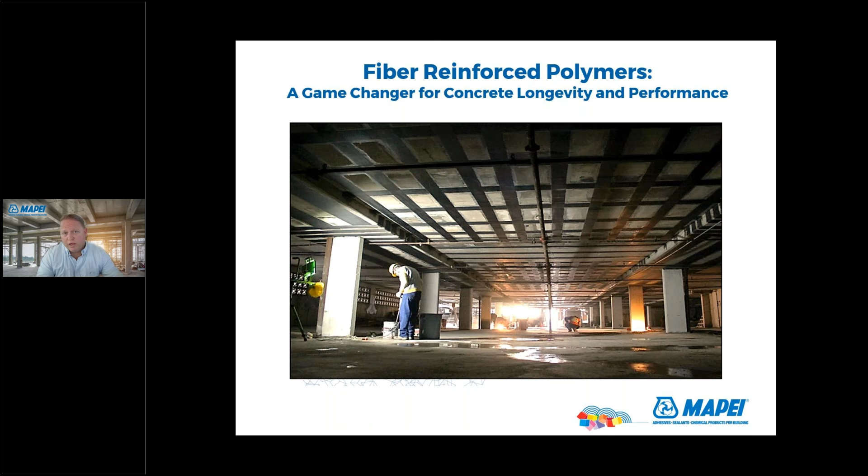Thank you, Brianna. Thank you guys for attending and listening to this today. I am a licensed professional engineer. I'm on the ACI 440 and the 239 committees. That's for FRP and ultra high performance concrete. I'm also a voting member of the ICRI 330 Strengthening and Stabilization Committee. I live in beautiful Tucson, Arizona with my wife and 4 kids. So I hope today you'll be able to take some valuable information for upcoming projects that you might have.

A little bit about MAPEI. MAPEI is one of the largest construction chemical manufacturers in the world. We're headquartered globally in Milan, Italy. Our U.S. headquarters is in Deerfield Beach, Florida. We have 24 product lines that over 6,000 products fall into.

MAPEI, being an Italian company, has the Italian culture of producing quality products. If you think of an Italian car or Italian clothes or handbags, you're always thinking these are top of the line quality. It's a cultural thing. It's the same with MAPEI. We make very high quality products. I work for several manufacturers and contractors, and I don't hear people saying bad things about the quality of MAPEI's products.

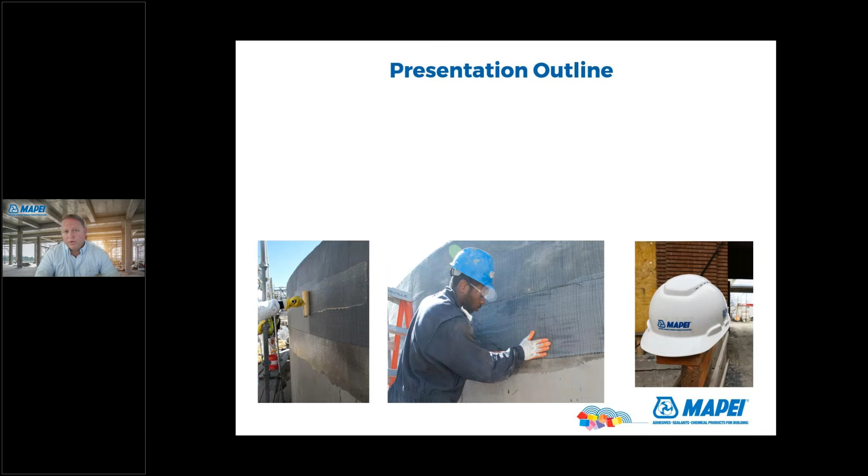So here's an outline of what we're going to talk about today. What are fiber reinforced polymers, or FRP? Their properties, some typical applications, some installation and quality control recommendations, design guides, what's the role of the engineer, and how MAPEI assists and comes alongside the engineer in this process.

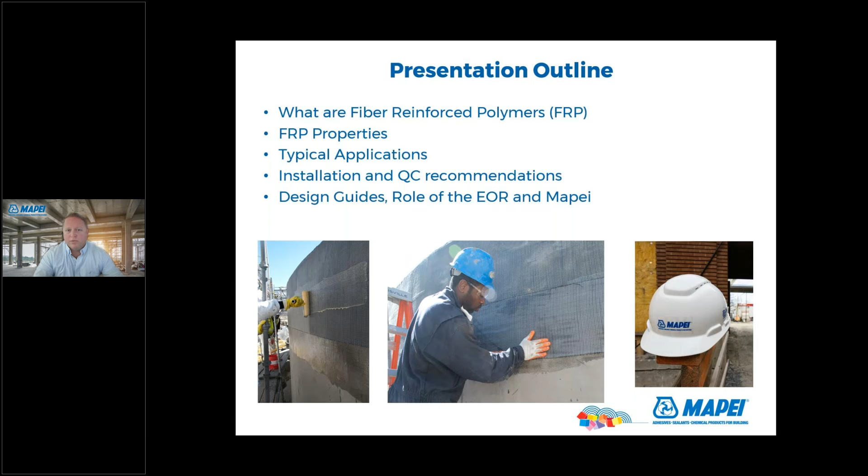There's a lot of industries that have been using FRP composites. You think of the sports world with the carbon fiber bicycles and golf clubs, snowboards, hockey sticks. Same with the automotive, like I just mentioned, the Formula One race cars. They're made with carbon shells, very lightweight, very strong.

The industry that's done by far the most testing of these materials is the aerospace industry. And I tell people, if you're comfortable flying in a carbon tube at 30,000 feet going 700 miles an hour, you should feel comfortable having these same type of materials used on your local bridges and the buildings you work in. They've also been used for decades in the marine industry.

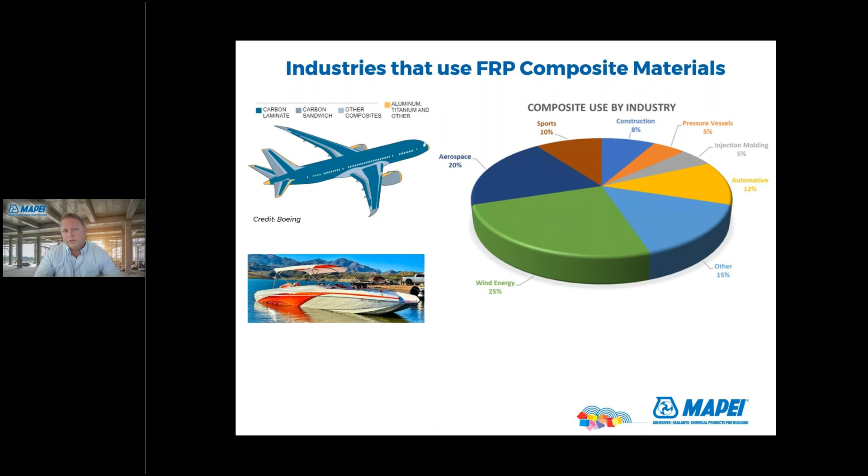You think of these hulls of boats. They use a fiberglass and a low quality resin, typically a polyester resin. These boats sit in salt water day in, day out for years, and they perform very well. It's also used in more harsh chemical environments like septic tanks, where you have hydrogen sulfide gas, and they use the same type of fibers but just change the resin system. In those resin systems, typically they'll use a vinyl ester instead of a polyester or an epoxy type resin.

Now, for the construction industry, there are a couple limitations. One, these materials are expensive relative to traditional materials. You think of what concrete and steel are going to cost way less than these composite materials. And they also have a poor fire endurance, especially the epoxy.

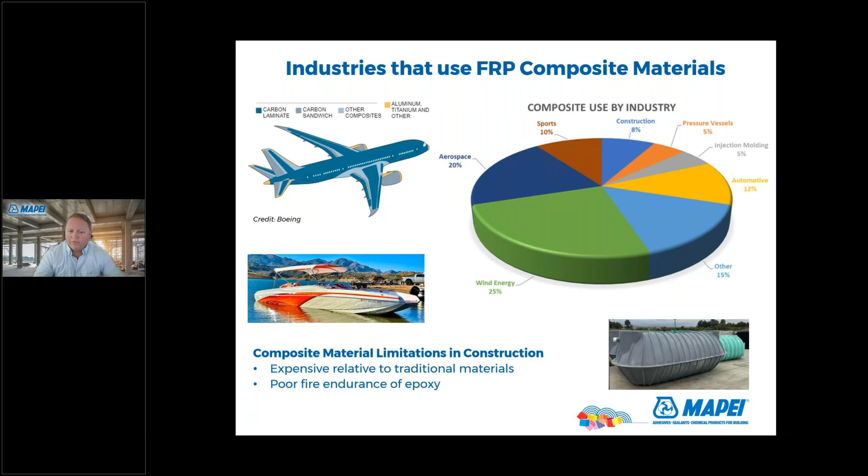So reasons to strengthen your structures. One, maybe you have a change in use. You're transforming a hotel into a hospital, and you're going to have a higher use.

Or you think about all these old bridges that were built, and we did not foresee the sizes of the vehicles going over them, or parking garages, and now we have these electric vehicles that weigh considerably more than what they initially were designed for.

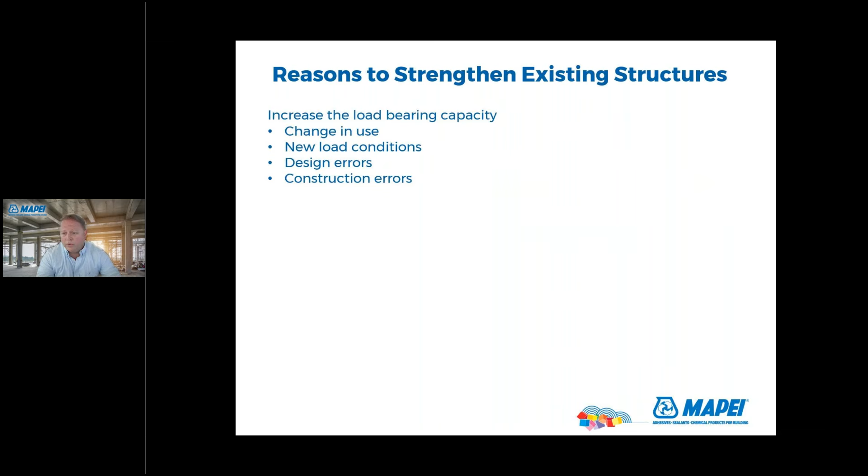Sometimes there's design errors. Sometimes there's changes to the code. One great example of this I like to give is the ACI code for concrete columns before 1970. Then they didn't have much detail on the ties that went around the columns. They just said, put it every 12 inches, regardless of the size of the column, regardless of the size of the longitudinal bars.

What happened is the Loma Prieta earthquake, where there was significant loading and the concrete shell on the columns broke off and those ties opened up. And so the design community came back and said, there's got to be a better way to do this.

So now the hooks are determined. There's now a 135-degree hook that goes into the column, and that way, under significant loading, it pinches the hook and keeps it from wanting to open up. And then they've also changed the requirements for the size of those hoop ties, depending on the column size and your longitudinal rebar size.

There's also construction errors. This happens quite a bit, and one great example is there's two nine-span bridges being built. The contractor finished the first, and when he was building the second nine-span bridge, the inspector came by and told the contractor, hey, it looks like you're leaving out half the steel on the deck.

And the contractor goes, no, I'm doing this the same way I finished the last one. Well, the first inspector and the contractor missed it, and so now you have a brand new nine-span bridge that is built. What do you do? Well, the engineer knew about FRP and that it can be used to strengthen his new bridge.

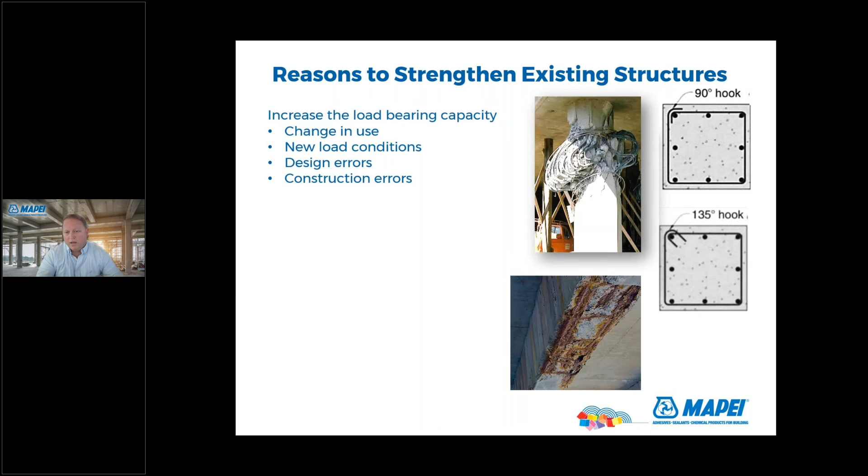Another common thing that can happen is a loss of capacity. This typically comes from corrosion of the reinforcing steel. That's the most common cause.

Sometimes the steel gets cut or damaged. You think of contractors like a plumbing contractor that doesn't scan the slab and he's cutting through and he severs some bars. You have impact damage, maybe a vehicle hitting the bottom of a girder and exposing some of the steel or the strands. There's fire, natural disasters.

They're also used to increase seismic performance. This is one of the main interests early on, because these materials are very lightweight. You're not adding a lot of dead load to the structure, and you're able to increase the strength of the structure.

And then same with blast resistance. A lot of the federal buildings utilized doing an FRP retrofit because they're concerned about a terrorist attack and having a progressive collapse where a terrorist takes out a column or two and the whole building collapses. So they use FRP to strengthen that to prevent those progressive collapses.

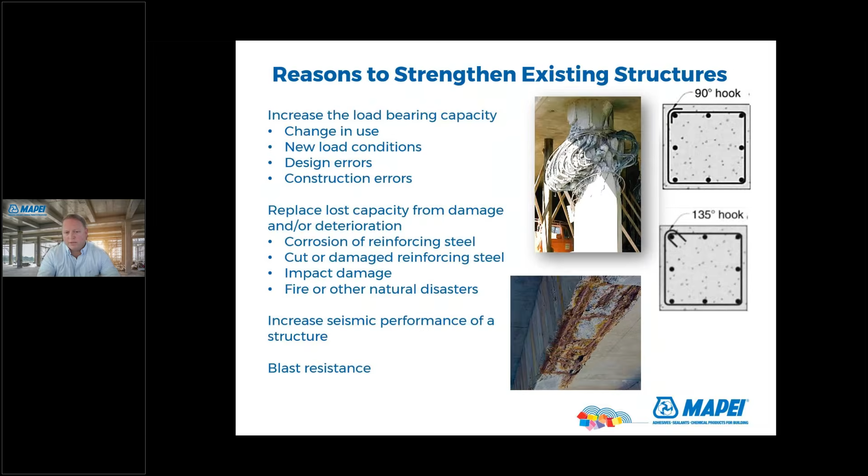So fiber reinforced polymer, it's a high strength fiber, carbon or glass. And just to compare these, a typical rebar in construction, you have about, say, 60 KSI. The dry fiber strength of these carbon fabrics is around 700 KSI, so about 10 times stronger.

Now, unfortunately, there's no way to utilize the dry fiber in our projects. We actually have to get it wet with epoxy to adhere it to the structure. And when you do that, it ends up lowering the strength, but it's still around 210 KSI. I just took an example of MAPEI's kind of middle of the road carbon fabric. So significantly higher tensile strength than the steel.

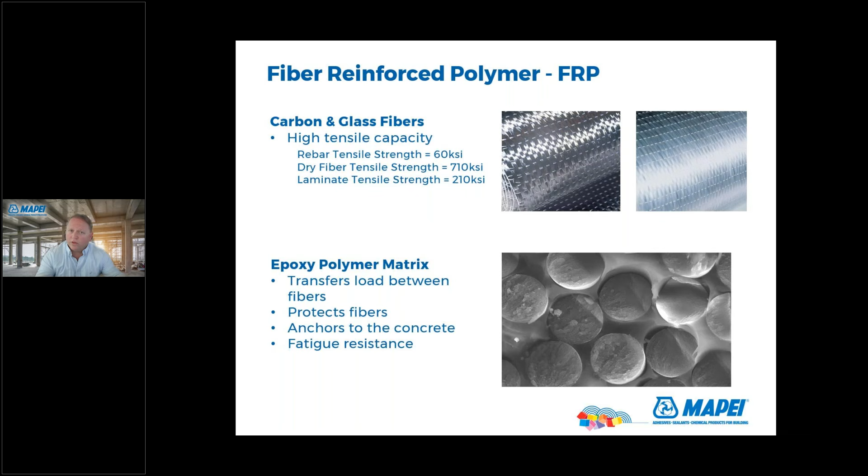And these fibers are getting saturated in an epoxy matrix. So these fibers are very thin, about 1/25 the size of a human hair. And this epoxy helps transfer the load between the fibers, it protects the fibers, and most importantly, it anchors it to the concrete itself.

So some advantages: FRP is very lightweight. It has a very high strength to stiffness ratio. It's non-corrosive. This is one of the miracle properties of it, especially as our existing structures are corroding. By adding additional reinforcement that will not corrode, that's a huge win.

It has a very low profile, very thin. Great application on the bottom of parking garages, on the bottom of joists, where you can't add a lot to the cross section because you have trucks driving in there and everything else.

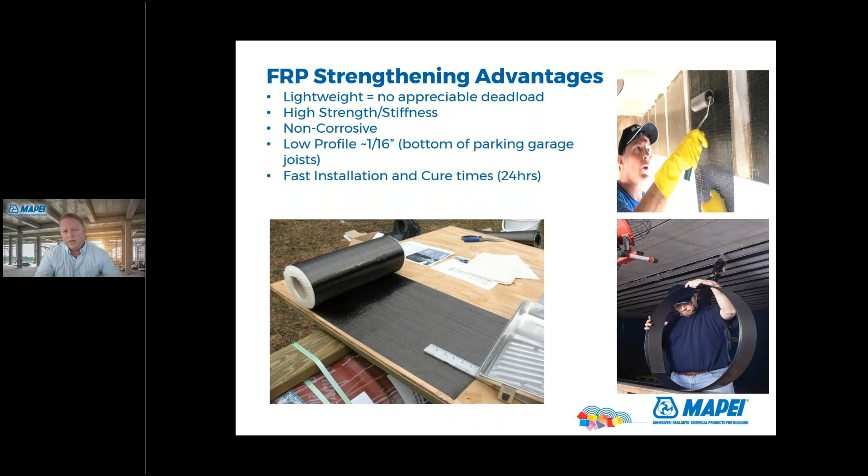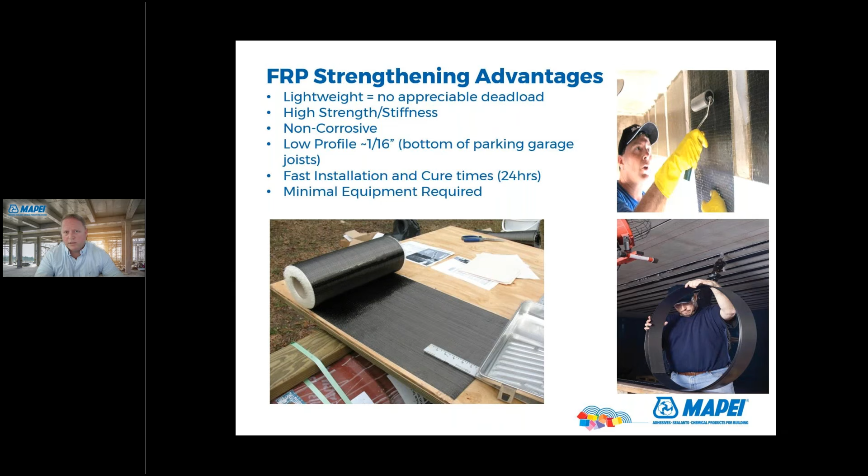There's a fast installation and cure time. Typically, by the time you put it up, 24 hours, the system's cured, your structure's strengthened. And then also very minimal equipment. You don't need heavy equipment. You see a roll of fabric. You see this gentleman just carrying some of this material, buckets of epoxy. So minimal equipment required to do these projects.

So some FRP material properties.

FRP is linear elastic until it has brittle failure. Steel has a very nice behavior where it gets up to its yield strength and then it basically yields. What that does, and why engineers like it, is it gives us a visual indication that something's wrong. As the steel begins to yield and stretch, we get to see the ceiling or the bridge starting to sag, and you go, something's wrong, let's get the people off of it and take a look.

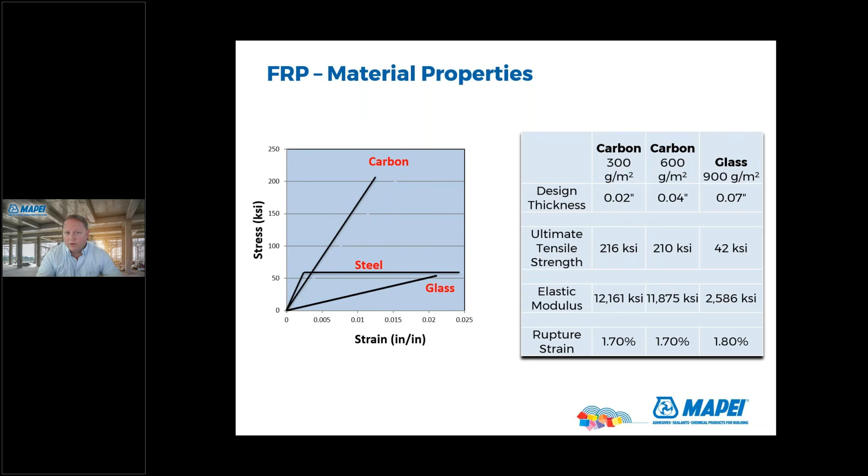FRP does not have that. FRP does have a brittle failure. So although the materials are much stronger than steel, it does have this negative limitation where it has brittle failure. Now, the ACI 440 guide takes these into consideration so you're not getting to these ultimate values.

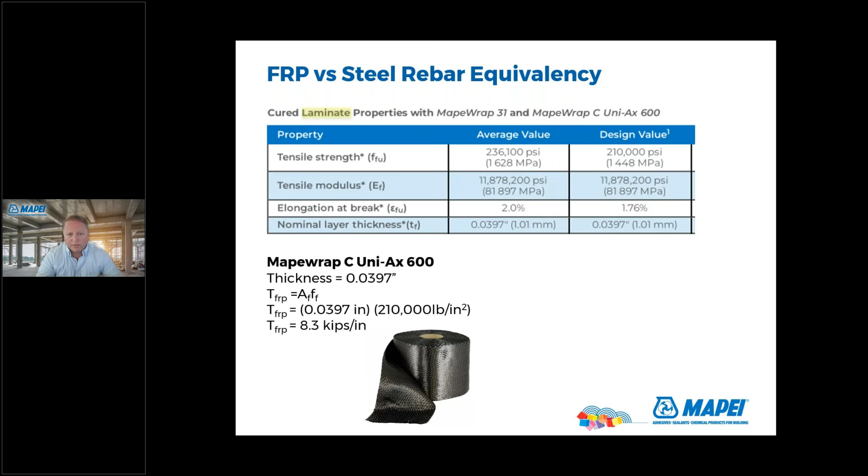A little comparison between FRP and steel rebar. I took this middle of the road carbon fabric from MAPEI, and looked at the thickness of one layer. The cured system is 0.0397 inches, so very thin. To calculate the tensile force, you take the area of that fiber times the tensile strength. The design strength is about 210 KSI, which gives you about 8.3 kips per inch. In layman's terms, that's 8,300 pounds for every inch of one layer of the fabric, basically like one layer of fabric could lift up an F350.

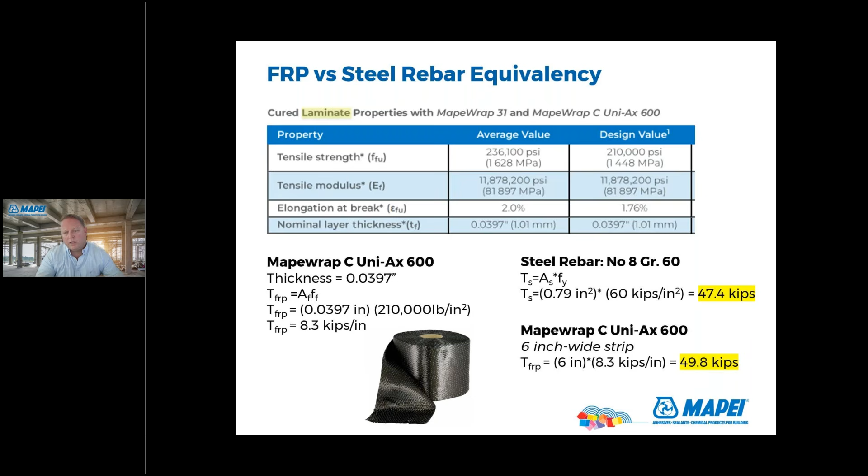If you wanted to compare that to rebar, you take the tensile area of the steel times the strength of the steel. A number 8 bar, grade 60 steel, 0.79 inches times 60 KSI is 47 kips. So how many inches of fabric do I need to equal this out? About a 6-inch wide strip gives you the same amount of kips as a number 8 bar. So the materials are incredibly strong.

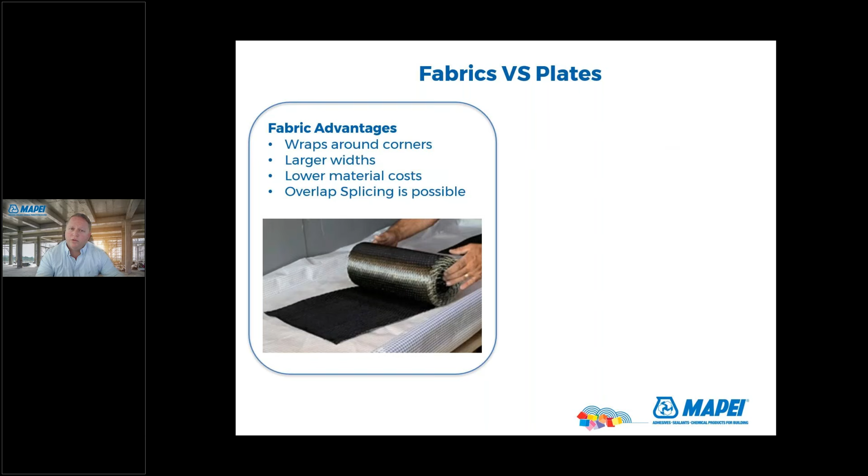There's fabrics and there's also plates, and they have advantages and limitations for both. With the fabric, it wraps around corners, it has larger widths, the material cost is lower, and you can do overlap splicing as well. The plates, you're not able to do that, but the plates are factory laminated, so that increases the quality assurance, where you don't have a contractor in the field saturating the fibers and making sure he's mixing it correctly. This is done in the factory.

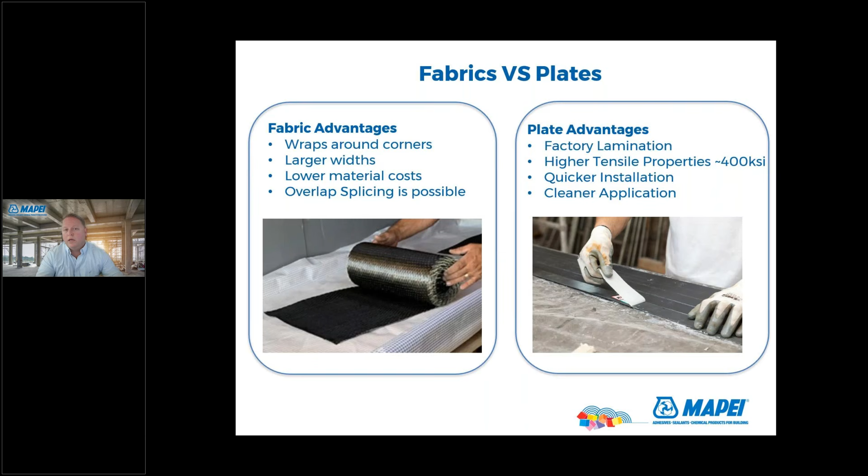The plates also have a higher tensile value. Instead of 200 KSI, you're looking at 400 KSI. It's quicker installation and generally a cleaner application. You're using less epoxy, less surface prep. So the plates have advantages, and the fabrics also have advantages.

To show you the different costs for upgrading a beam: if you have a 16-inch wide beam, maybe 40 feet long, and you want to do a 50% upgrade in the live load, you could go the conventional route and add a couple number 4 bars, form it up, add some grout in there. Between materials and labor to do that beam, it's probably going to be around $4,000.

Now if you use the fabric, one layer of our lightweight carbon fiber adds about 8 pounds of dead load, placed by hand. Materials and labor comes out around $1,800. If you did the plate, one strip of a 4-inch plate, same amount of dead load, placed by hand, comes out around $1,400. There's different ways to skin the cat, and each project is different, but in general terms, this is the cost difference for strengthening beams.

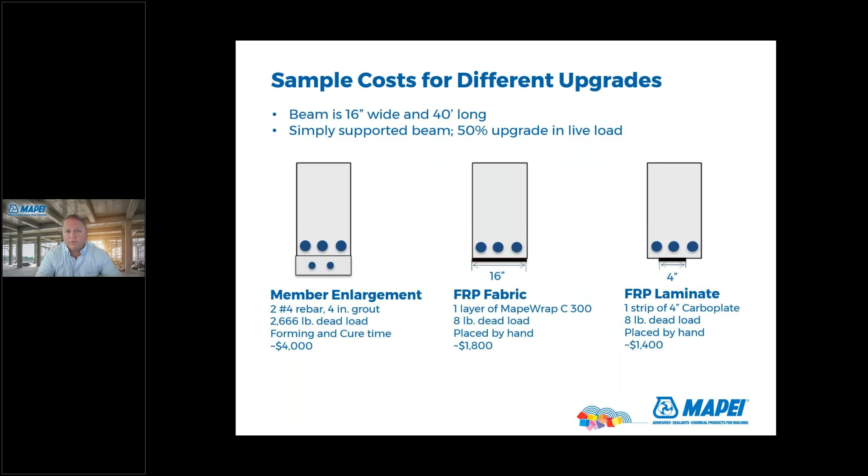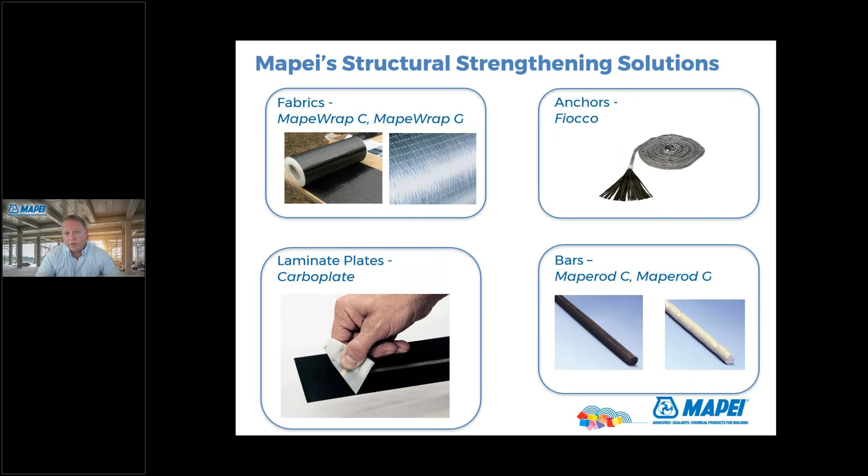MAPEI has a whole suite of FRP type products. We have the fabrics and the plates, we also have these carbon FRP anchors, and then same with these bars - we have carbon bars and glass bars as well.

Before you can even consider using FRP on your structure, there's a few things you need to look at. First, you need to make sure the compressive strength of the concrete is above 2,500 PSI. If it's below that, FRP is not going to be a candidate for your structure. The other thing is the engineer of record needs to look at the primary or existing reinforcing in the concrete member and make sure it is above this 1.1 service dead load plus the 0.75 service live load.

If the structure cannot stand with the existing reinforcing in there, we don't want to add a bunch of FRP, because what happens if there's a fire, or someone comes in and vandalizes the FRP, taking a grinder and cutting across these plates in this picture? We don't want the structure to collapse because of that. That's one of the equations that needs to be satisfied.

So if it can meet the primary reinforcing, but you have additional loading, maybe additional safety loads that are going to be added, FRP is a great candidate.

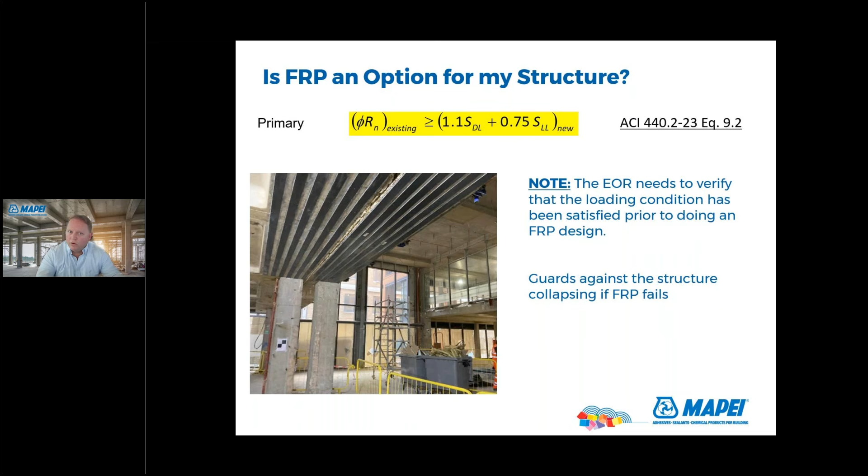In regards to FRP and fire, FRP has a poor resistance to heat and fire exposure. Typically around 140 to 180 degrees, the epoxy begins to transition from a cured state to a softer state. They call it the glass transition temperature. ACI says FRP composite should be considered completely lost in a fire event.

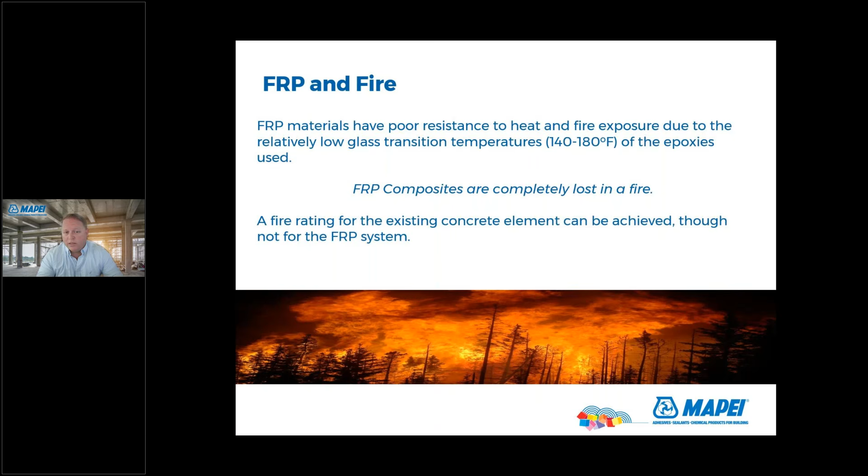Think of a 1,000-degree hydrocarbon fire. You can put different types of fireproofing coatings on there. They're expensive—some of these cementitious ones you can add a couple inches. What that's going to do is add additional cover to the concrete member so the steel interaction with the concrete isn't damaged from the fire, and so it can have fire ratings, but the FRP is not going to make it through the fire. Just something to be aware of.

So some typical applications for flexural strengthening: this is if you have a uniform load on the top and want to increase the bending capacity. On the bottom of this beam, the fibers on the concrete are going to be at the most extreme tension phase, and in a situation like that, you put the FRP there.

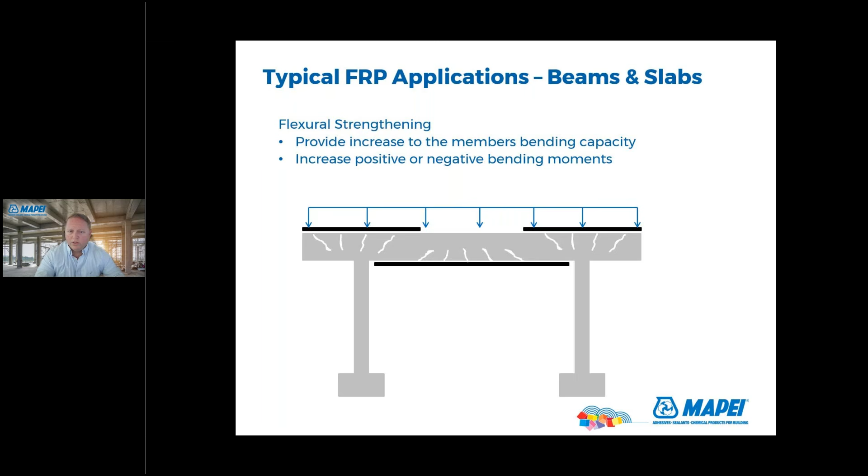But then think about the top areas above the column. If you add a load, it's going to want to sag the opposite way, so the FRP would go on the top. You can utilize FRP to address your positive and your negative bending moments.

Now, the way ACI approaches flexural strengthening is very similar for reinforced concrete as it is for FRP. In reinforced concrete, for calculating the moment, you're looking at the area of the steel times the strength of the steel times the distance from the neutral axis to the reinforcing steel. Similarly, the FRP's contribution is the area of the fibers times the effective stress of the FRP times the distance to the neutral axis.

Now looking at the neutral axis, you can see the FRP is going to be a little farther away than the steel rebars are. That's good—it gives you a little extra moment arm there to help give you a little bump.

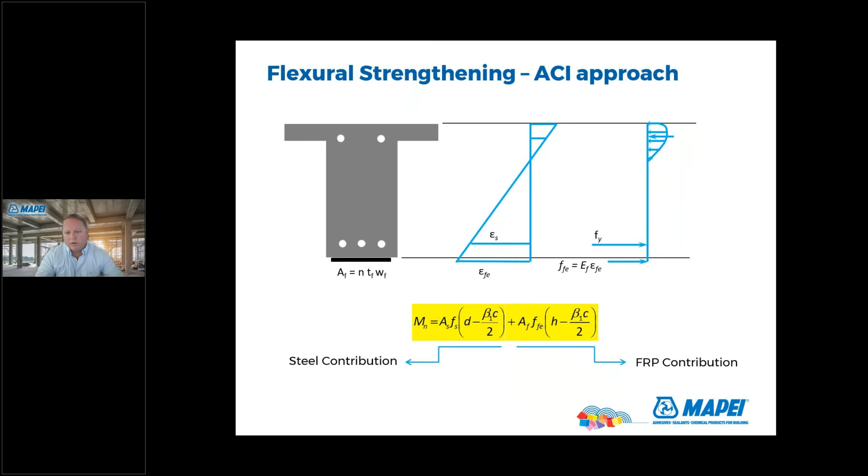Now, as it relates to effective strain, the strain level for an FRP system is typically governed by debonding of the cured system. So in practice, and what research from universities has shown, is that the FRP is going to debond before it reaches its ultimate strain.

And so the ACI committee derived strain equations to limit the amount of strain that can be utilized. We just don't want manufacturers like MAPEI getting callbacks saying we put up the FRP and now it's starting to come off. So these strain equations limit that strain.

Another thing is as the compressive strength of the concrete, F prime C, decreases, the likelihood of debonding increases. That's why we have a minimum of 2,500. If you have higher strength concrete, that's just going to help you.

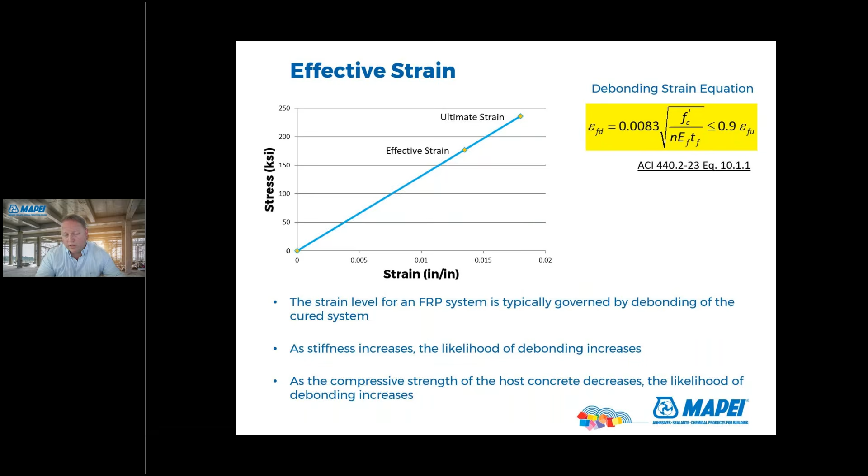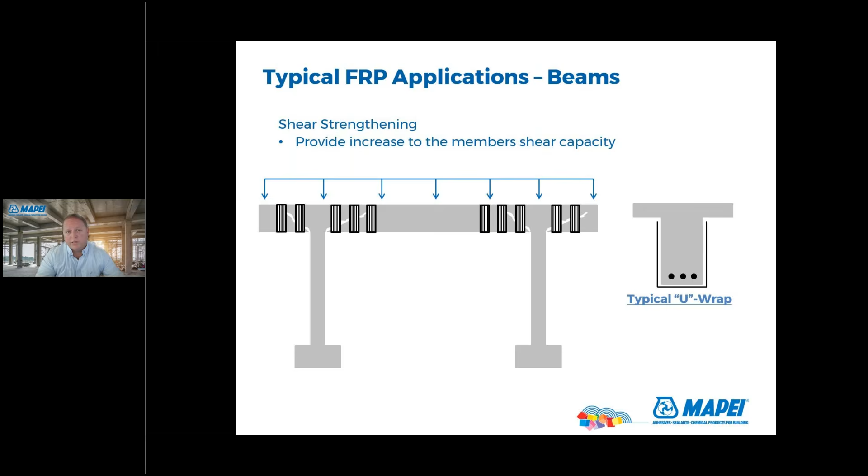Now, anchors are also used, especially in these applications for strengthening beams. We've seen that up at the top. That is an area where the development length is typically not long enough to develop the strength, and so it'll typically debond right up at the top there. So some of these FRP anchors are used where they'll drill into the slab above or the beam, epoxy that hole, and then stick these FRP anchors and fan it out to help increase that development length and keep it from debonding.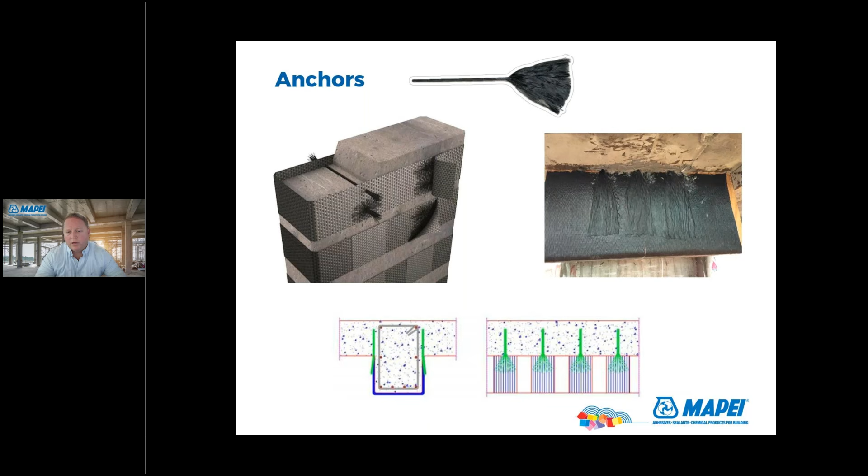So another common application, this is for walls. If you want to do some flexural strengthening on a wall, say this one on the left, you have a load, and on the right side of that wall, it's going to be in tension. So you put the FRP there, and you can do this in strips. We see this a lot with basements that are bowing from the outside soil. They'll go and put this FRP up against the walls. You're not adding anything, you're not losing any space in your garage by doing this.

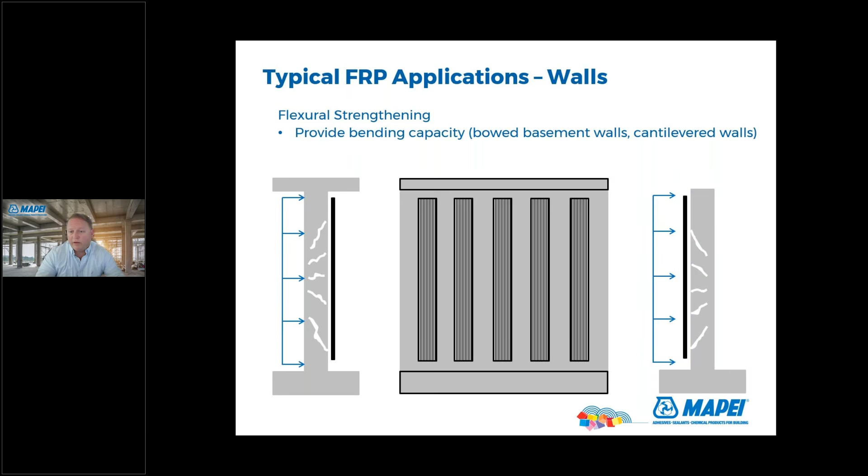And then here, this picture on the right, the wall is cantilevered. On this one, the FRP is going to go on the left because as that load pushes, the left side of that wall is going to be in tension and start to bend. And so you put it there.

Now, one of the best applications for FRP is when the material is going to be wrapped onto itself. These are confinement type situations. You think of columns or piles or even pipes. If you're looking at flexural or shear strengthening, you're really depending on the bond between the FRP and the concrete. Now, if the material is getting wrapped on itself, you're not as concerned about the bond. And so ACI says, okay, for flexural shear applications, those are bond critical applications. But for wrapping columns or piles, these are confinement.

And so with wrapping these, you can get an increase in the axial capacity. You think like the load's coming down, the column wants to dilate, and the FRP holds it in there. So you can take a 3,000 psi concrete and cause it to act like a 4,500 psi concrete.

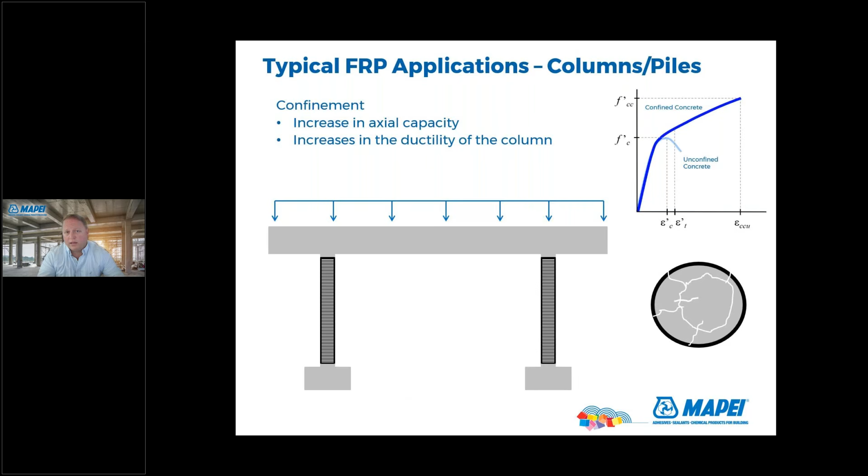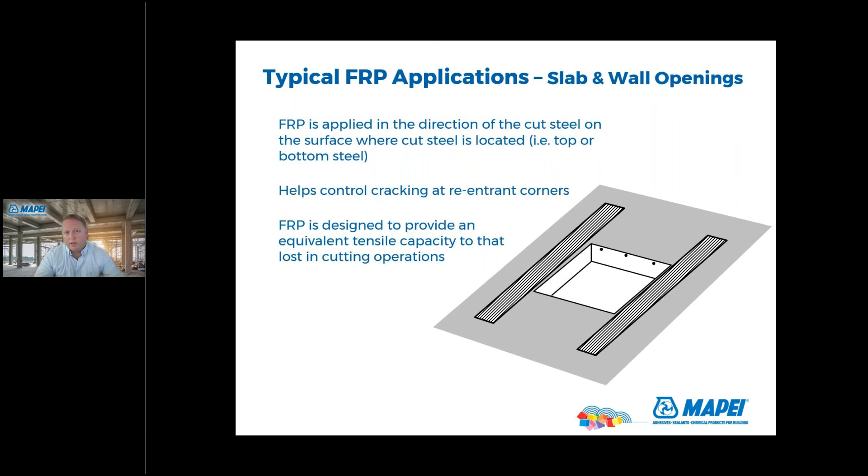Another common application, slab and wall openings. Maybe new ducts are being put in, or a new window or door, and you're going to be severing some of the steel. They can put FRP there to make up for the capacity that's going to be lost from severing those bars.

So this is some strengthening limits, typical ranges. Every project's different depending on the size of your member and the reinforcing that's in there. But for flexural, you're going to be looking at a range between 40 to 100% increase in the strength. Shear 20 to 150%, and then axial about 20 to 100% increase.

These pictures just kind of show you the existing reinforcing. You add some FRP. It's similar to if you had a tighter spacing on your bars or more bars in there.

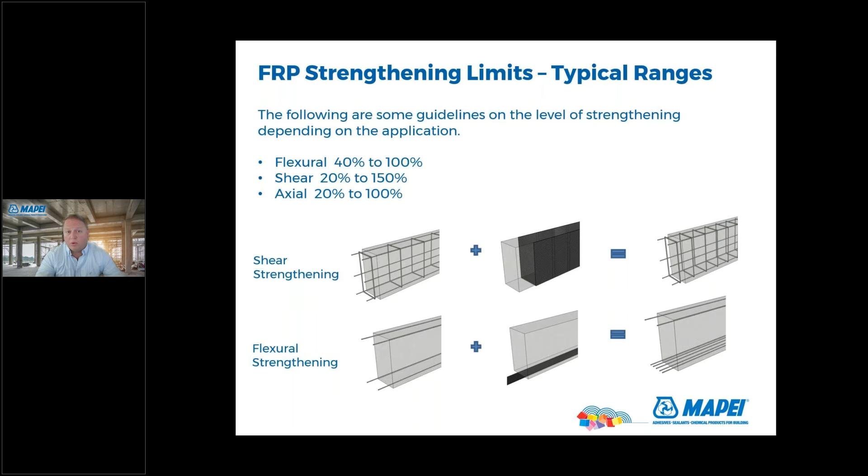So I have a few questions for you as the audience, having gone through some of these examples, just to see if you guys are retaining this and grabbing onto this. So this first one, we have a beam, uniform load. We have 4 scenarios. Where would you put the FRP? Would it be on the bottom, number 1? Would it be up at the top? Number 3, it has it showing on the side. And then number 4, has it showing on the side in the middle of the beam going up and down.

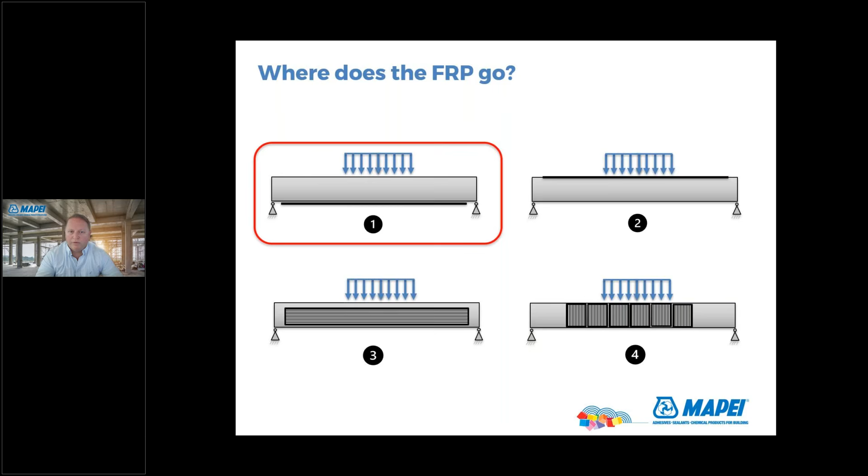If you thought number 1 makes sense, that's correct. Now, you could also do number 3, but you're not going to be able to utilize the full benefit of the FRP being farther away and getting a bigger moment arm. And so number 1 is a more efficient use of the FRP.

Here's a column, 3 scenarios. You got a load going down. You put FRP on number 1 here on the sides of it. Number 2, kind of wrapped around in confinement. Number 3 is going on the sides, and it looks like there's an anchor going into the footer there to help it. And so if you looked at this and you go, yeah, number 2, that would be correct.

Now, if we took this load instead of going straight down and we turned it and made it go to the side, then you would look at a situation like number 1 or number 3, because now you want to prevent the column from bending in that direction, so you want to look at those situations.

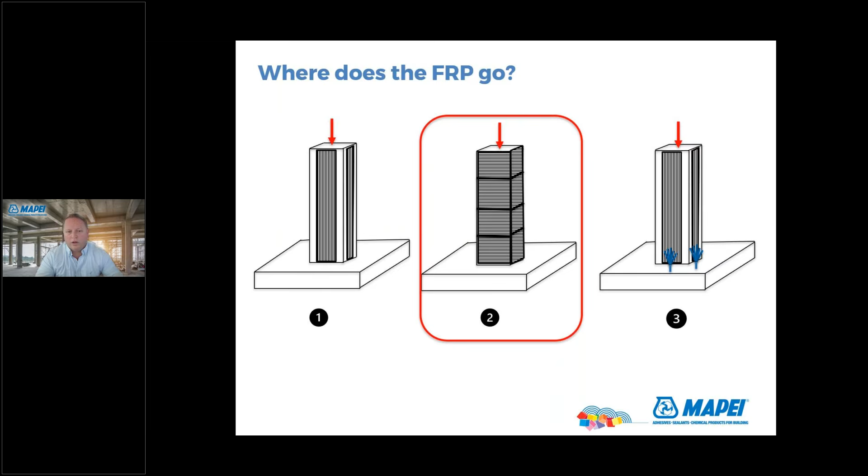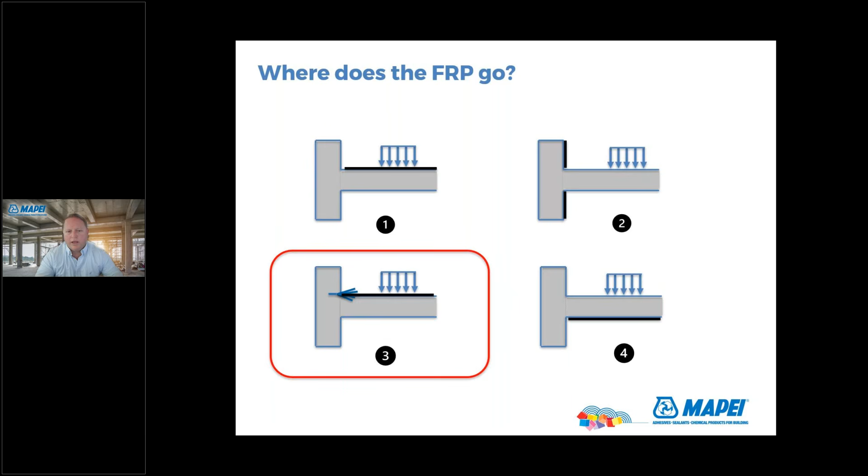All right, last one. You have a cantilevered beam here, uniform load on the top. Number 1, the top of the beam. Number 2, the sides of the column. Number 3, the top of the beam with the anchor going in. Or number 4, the bottom. If you thought number 3, that would be correct. The anchor's going in there to prevent it from having that 45-degree shear crack at that interface.

So another type of application is these near surface mounted rods. These are where a saw cut groove gets put into the concrete, it gets filled with epoxy, and then you put your reinforcing member in there.

These are great for applications where you're going to have maybe some vehicular traffic, like in a parking garage, maybe in a negative moment region where you needed it to be on the top of the slab, or on bridge decks. Because you would be concerned with the abrasion if you just use the fabric on the top. Over time, the tires are going to tear through the epoxy and eventually the fabric. So by embedding it into the concrete member, it's going to help prevent the FRP from getting damaged.

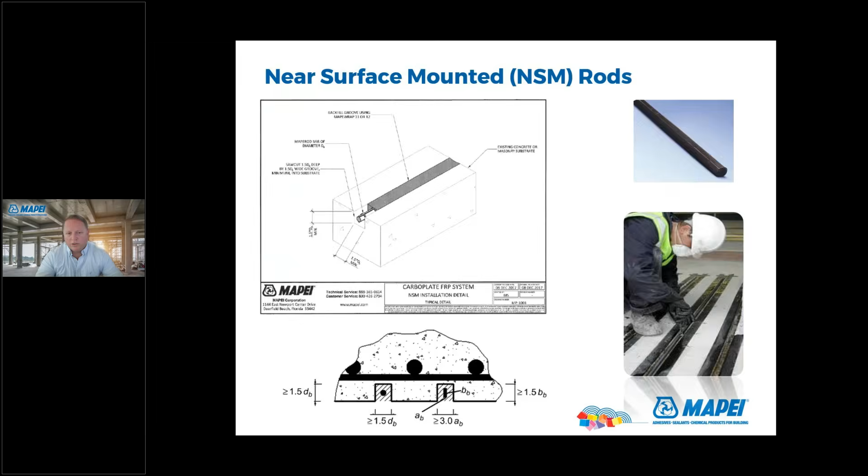So some pre-installation guidelines. One, you want to make sure that you have a surface profile of a CSP of 3. That ensures that the weak cement paste is going to be removed, kind of opening up the pore structure to help with the bonding of the system.

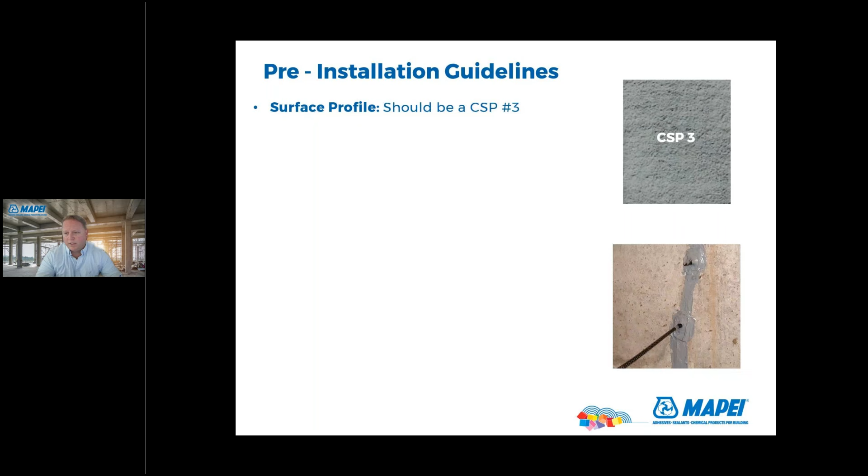You're also going to want to make sure you inject any cracks. Any cracks larger than 10 mils must be injected. What we don't want is the FRP to have any movement and cause any micro buckling in the fibers because those cracks weren't injected.

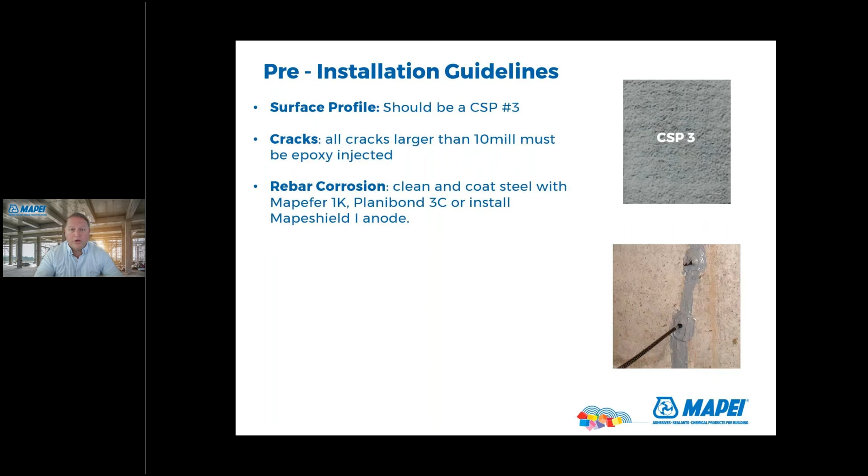If you have any corrosion on your rebar, you're going to want to clean that. You want to coat the steel with a coating. MAPEI has this Mapefer 1K. We have a Planibond 3C with cementitious or epoxy coatings. You can install anodes, basically add some energy back into the system from the energy that was lost, the electrons that were lost due to corrosion.

You're going to want to make sure the corners are rounded to 3/4 of an inch, and this helps allow for load transfer through the fabric. The concrete moisture, you want this to be below 3 pounds per 1,000 square feet or 80% relative humidity. And then the installation temperature between 40 degrees and 90 degrees.

So in some projects where it's much colder than that, or they're doing it in the winter, they'll tarp off the area and they'll add external heat sources.

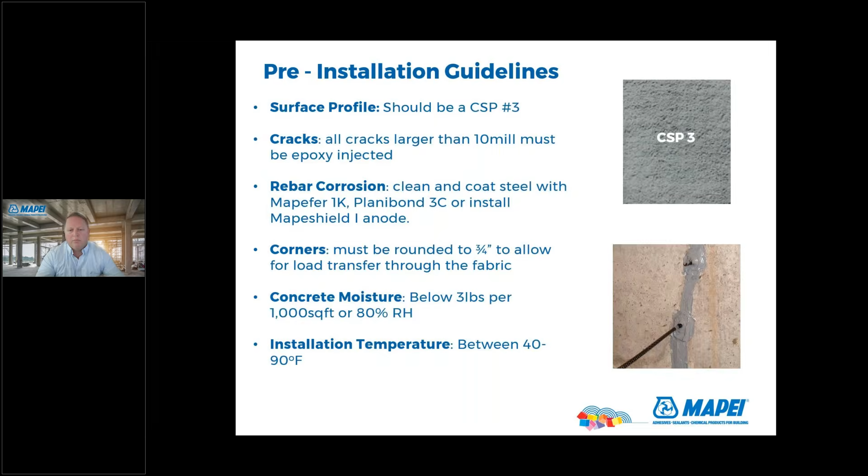I'm in southern Arizona where it's very hot, and so there are things that we do for utilizing FRP here where we'll help condition the resin system, whether keeping it cool the night before, like in your hotel room, or even putting the resin in ice baths before mixing, because as it gets hotter, the resin is exothermic, so it's going to heat up, and you're going to have much less working time. So by keeping it cool, same type of thing you do with concrete in warmer environments, adding ice, but keeping it cool, you're going to extend that working time.

So some installation steps for the MapeWrap fabrics. You're going to apply a primer. You're going to use this epoxy adhesive. This is a thicker epoxy. We have MapeWrap 11 or MapeWrap 12, and these are formulated for different temperature zones. So depending on the temperature of your project site, you're going to want to select the correct one to make sure that you have the ideal working time for those that are going to be installing the system.

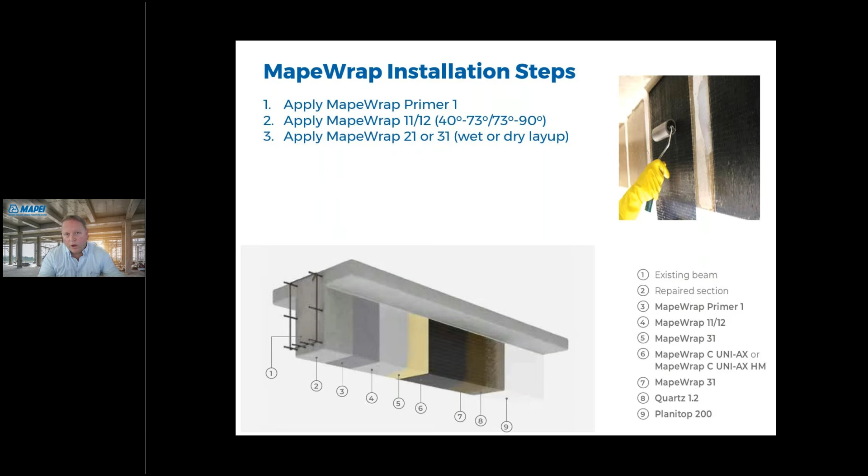And then we have 2 resin systems formulated for if you want to do a wet layup, which is where you are going to be saturating the fibers before you put it onto the concrete. This can be done with a saturating machine where the fibers will roll through a machine. There's a resin bath, it will get it all wet with resin, and it'll squeeze out any excess, and then you roll it onto a PVC tube and take it over to where you need to install it.

And then there's the MapeWrap 31. This is a dry layup system where you're going to be putting the fabric on dry. So you put the primer, your epoxy adhesive, and then you'd roll with a nap roller some 31 resin. You put the fabric, install it dry, and then go back again with that nap roller and roll another coat of the 31 epoxy on there.

Dry layup is typically cleaner. Some engineers like the wet layup, some contractors like the dry layup. They both work, and we have systems formulated for both.

Now, I will say that I have seen some manufacturers that for FRP, they'll have one resin system for all 3. I personally kind of cringe a little bit at that, because they'll have the saturating resin and they'll use it to prime the surface. And then if they need to thicken it up, they'll add some fumed silica on site. I'm not a fan of contractors taking the role of a chemist and just adding things into a system that's been formulated with structural engineering calculations behind it.

And so at MAPEI, we have these 3 different resin systems to address having the best bond - that's the low viscosity epoxy - having the right adhesive depending on your temperature zone, and then giving the engineer or the contractor options if they want to do a wet or dry layup.

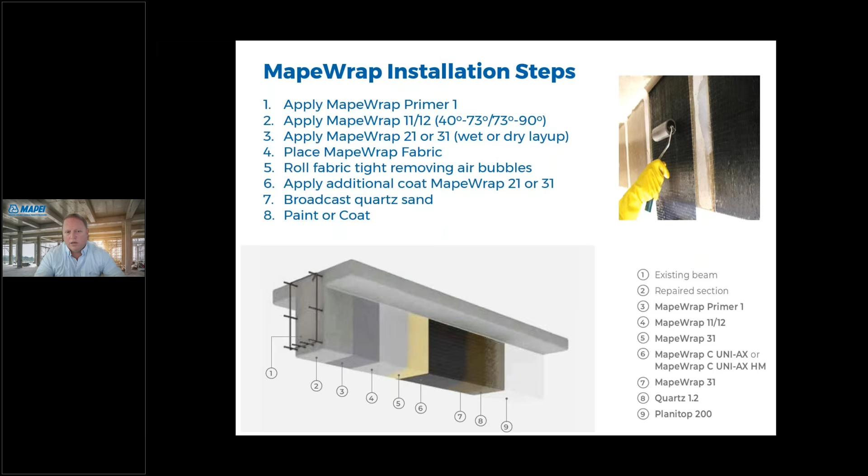Carboplate installation is similar. You'll apply the primer, the adhesive - it goes to the back of the plate and then also to the concrete member that it's going on for, say, the bottom of a beam. And then you're going to adhere it with a smooth hand roller. You'll push it in and squeeze out the epoxy, making sure it's fully bonded.

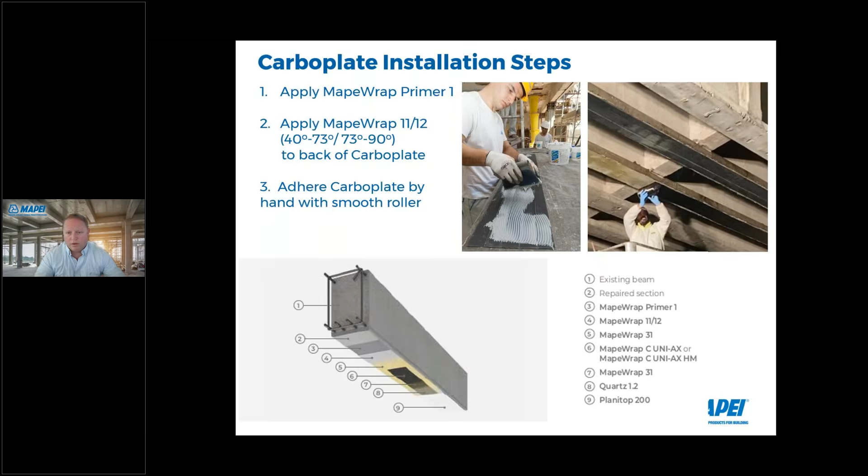So, quality assurance and quality control items. There's ASTM D3039, this is a tension test. This is where, as a contractor is installing FRP, he'll make witness panels, which is just a 12-inch by 12-inch piece of fabric. We'll put it between 2 pieces of plastic mylar, and that will get sent to the lab. The lab will take that sample, cut it into little pieces, and pull it apart. They're going to measure the modulus, the strength, and the strain.

We've seen this can be a common item. Manufacturers aren't too crazy about it because it becomes more of a test of how well the contractor can make a sample for the lab. If the contractor doesn't squeeze all the resin out and you have real thick resin, it's going to lower your tensile strength value. Same with if the contractor doesn't perfectly align the fibers in one direction - if he has some waviness, that's also going to affect it. So that can become a problem on some projects where if the contractor made some bad samples, you're looking at it going, how do we correct this?

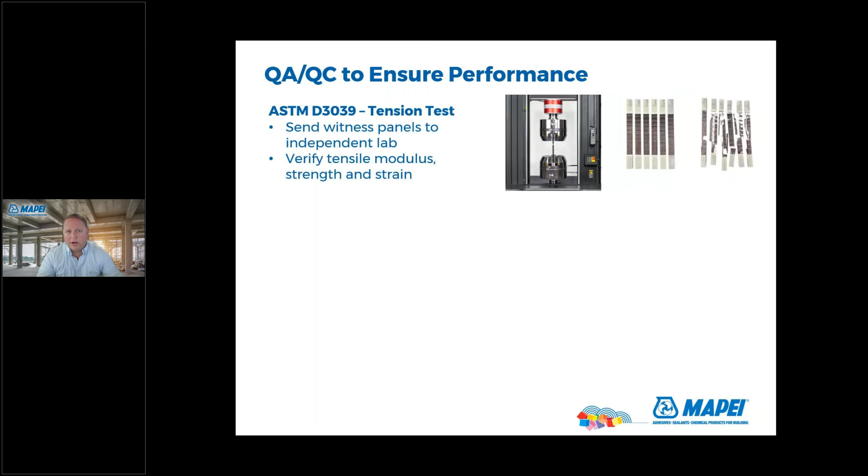A more important test is a bond test, and there's a couple ASTMs for this - ASTM D4541 and ASTM D7522. They both work. 7522 is a little bit more geared toward FRP applications, whereas D4541 is more general coating type applications. But you're going to want to make sure that you have 200 psi above that. If you have above 200 psi when you're pulling that off, you pass.

This is done before the application of FRP and then also after the application. And then you're going to want to make sure you test this in areas that are low stress. So if you are putting up FRP on the bottom of a beam to increase the flexural capacity, you don't want to test it right in the middle of the beam where the moment's going to be the highest - you want to do it on the side. So that's common testing that we see.

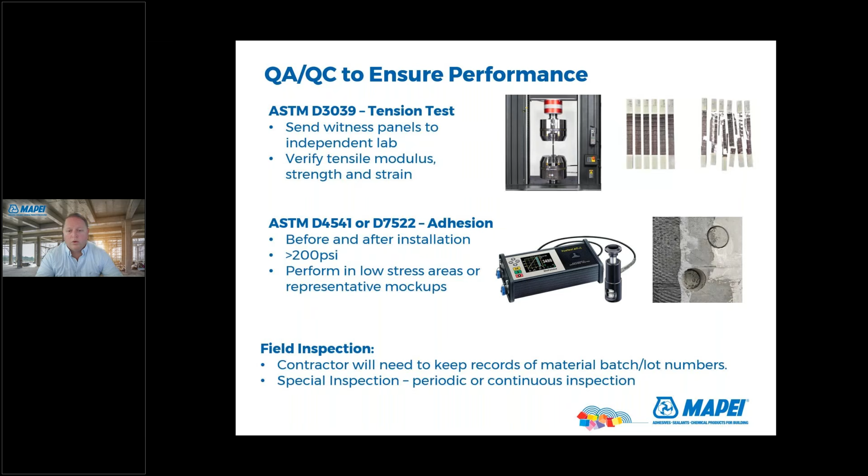Then there's field inspections. The contractor's going to want to keep written records. There's special inspections - sometimes the owner will want the manufacturer or an inspector to come out and give periodic or continuous inspection, depending on the project.

Another type of quality control test is this ICC Evaluation Service - that's International Code Council - and they test essentially the resin system. So a lot of these fabrics, the carbon fiber in general, there's only a handful of companies in the world that can manufacture these. And so these systems get put together where we're taking the fibers and these different epoxy systems and we test it all together. And then this ICC does a durability test to make sure that the system the manufacturer put together is durable.

So for quality assurance control, this is a daily inspection. I'm not going to go through all of these, but it's here for your reference if you wanted to pause this recording and look back later.

I will say one thing with the delaminations. Sometimes this can happen, and ACI sets aside some acceptance criteria depending on the size and number of delaminations. If you have small ones, less than 2 square inches, fewer than 10 per 10 square feet, that's fine. If you have large ones, they need to be cut out and patched back with a new piece of FRP, and then the mid-sized ones can be repaired by injecting epoxy into the bubble.

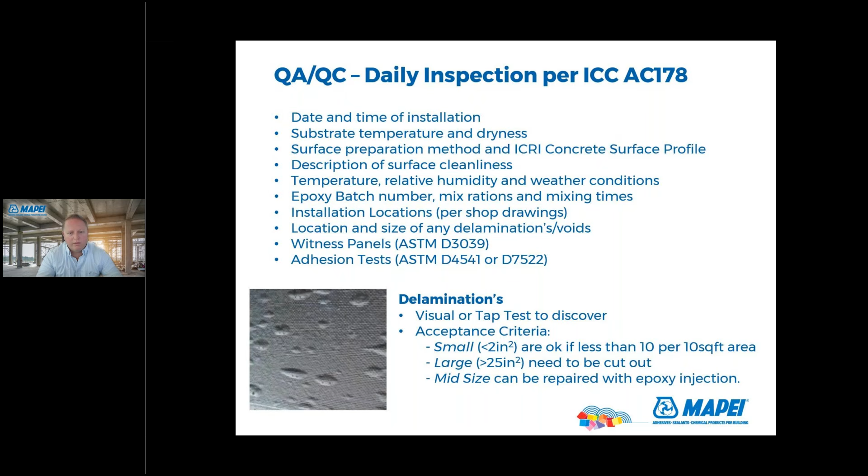One thing to note is during installation, it's always nice to try to install these as the temperature outside is dropping. That has to do with moisture in the concrete member. As the temperature increases, it's going to cause some vapor drive of the moisture. And if you're putting up FRP and the project continues to get hotter, you can have some of that moisture seeping through and creating these little bubbles. So as the temperature is dropping in the evening, that vapor drive is not really going to become that much of an issue.

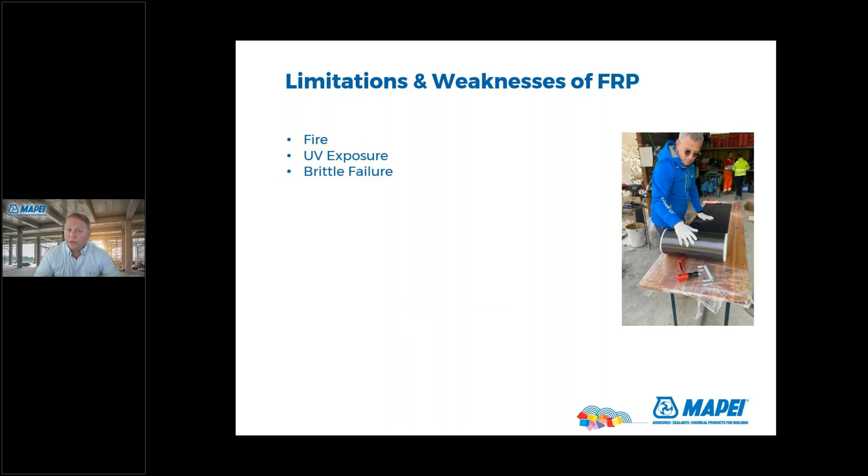So with everything, there are some limitations and weaknesses, same with FRP. Fire, I had already talked about - the epoxy does not do well in fire. UV exposure - this applies to epoxies in general, so you're going to want some type of coating because it's not going to do well to ultraviolet rays. It has brittle failure, which is not good in punching shear applications. The fabric will debond, so if that's what you're trying to avoid - having a punching shear - and you're using FRP, that's not the right application.

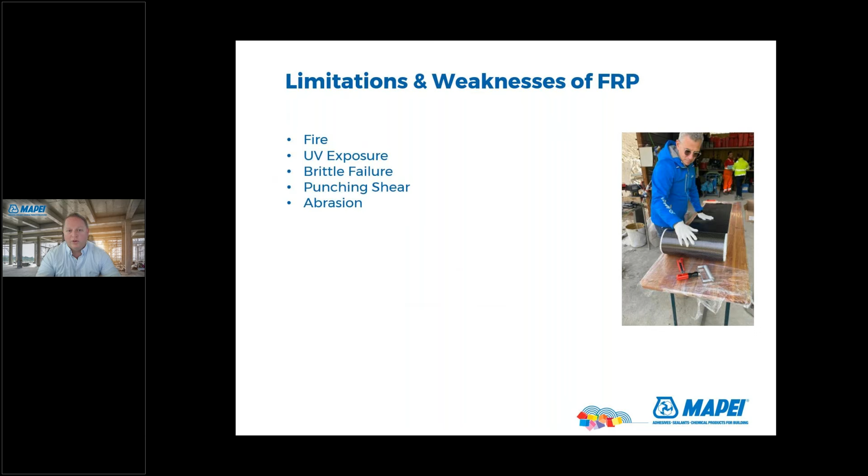Abrasion - I mentioned with vehicle tires driving over a fabric, you want to avoid that. Years ago, I was working with a grain silo engineer, and we were looking at strengthening some concrete silos, and we were going to put FRP on the inside. He asked the question, 'How does this hold up to soybeans?' And I was like, 'I don't know, I think it would be okay.' Well, it turns out soybeans are incredibly abrasive. They're like little mechanical gears the way they slide up and down the concrete, and they'll just eat up concrete. So learning that, I was like, that's the wrong type of application. We avoided that - the fabrics don't do well in abrasion.

Installation errors typically come from the surface prep of the concrete and mixing. If you get these right, that's about 90% of it, so you can avoid a lot of the installation errors. Another limitation is if your concrete does not have 2,500 psi, it can't be used.

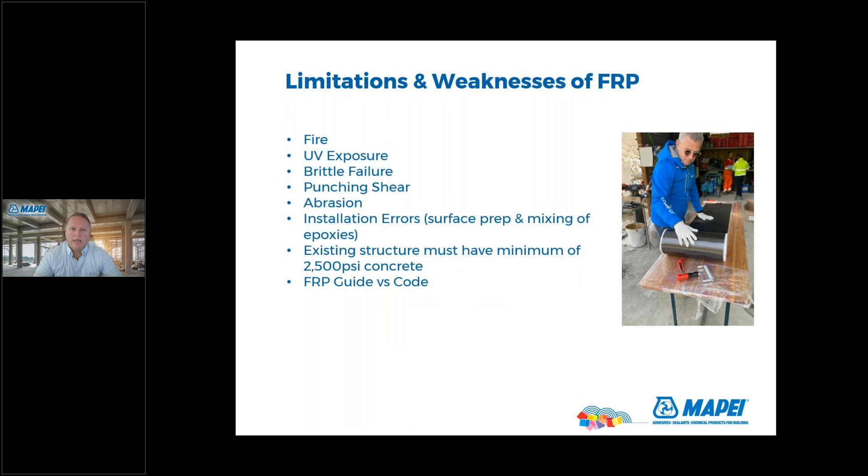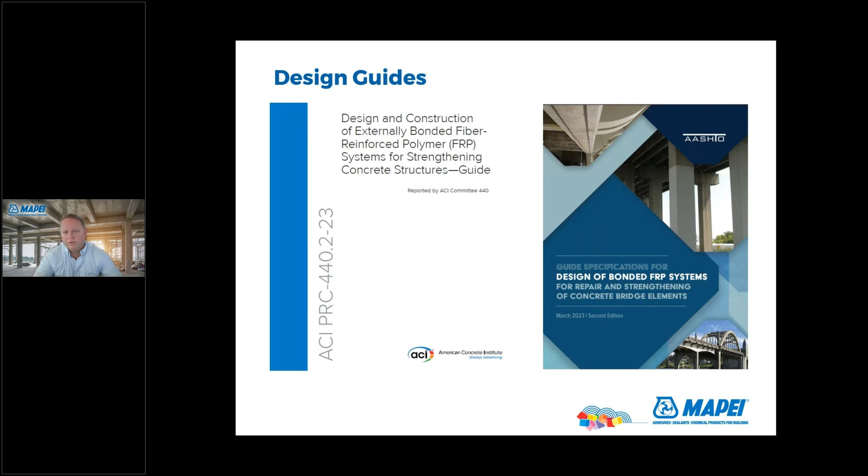One thing for structural engineers - FRP right now has design guides, there are no codes. The ACI 440 is the prevalent design guide that most people use. Now, this will be getting adopted into code language in 2027 by the IBC, and I think a lot of structural engineers will be more comfortable designing from a code than a guide. On the right, there's also an AASHTO design specification for bridge girders.

So how to specify FRP? This is typically done two different ways. You could do it in-house - this would be prescriptive, where the engineer designs the FRP system. He's going to say this is the number of plies, the width of the plies, and the direction the plies need to be installed. Then he'll specify acceptable FRP products that meet these minimum values, the tensile strength and the modulus. The contractor then takes those and submits the manufacturer's technical data sheet to say, 'this is what I'd like to use on my project.'

We often see this with non-structural applications, like confinement of spalls or protection wraps. There's a lot of DOTs that use this confinement of spalls - if they're repairing concrete, they put it on, and then the spall ends up popping off a few years later.

They wanted to avoid that, so they started putting these typically glass FRP over these spall locations, and that helps it from popping off. A lot of DOTs, Illinois, Indiana, Texas, I've seen California, Washington, Massachusetts, Pennsylvania.

Another type of application is performance. This is where the engineer of record is going to delegate this out to a specific FRP engineer. In these situations, he needs to provide a little bit more information: the strength of the concrete, the strength of the steel, the dimensions of the member you're looking to strengthen, the existing reinforcing and layout, the concrete cover, and what is the existing capacity and what does he want the ultimate capacity of that member to be. This method of delegating removes some liability from the engineer of record, and we've seen this used on the majority of FRP projects that require structural upgrades.

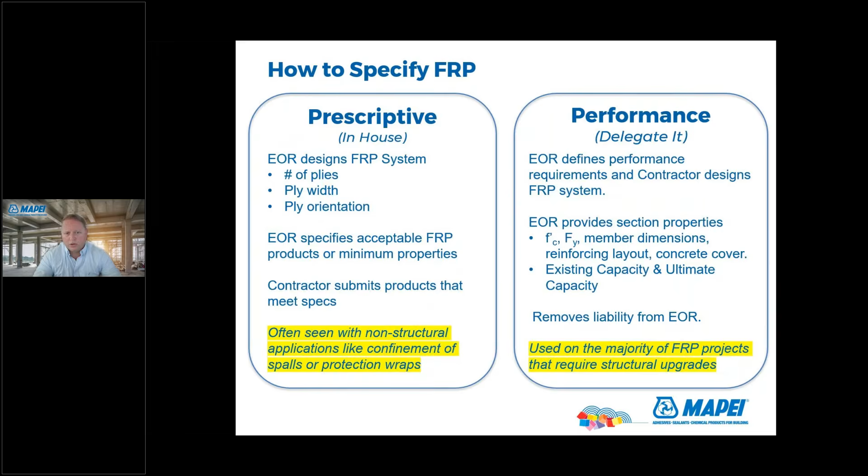So the structural analysis phase—this is what the engineer of record is going to do. He's going to be responsible for doing a condition assessment and analysis of the structure. He's a structural engineer, that's what they do. He's going to determine the location and magnitude of the deficiencies, verify if FRP can be used—remember that equation we talked about?—and then determine who is responsible for the FRP, whether it's himself or if he's going to delegate it.

Now, MAPEI, we're a product manufacturer. We are not a structural engineering design firm, and as such, we are not going to be stamping calculations or stamping drawings. We partner with other firms to do that, and we do work with engineers during the design phase.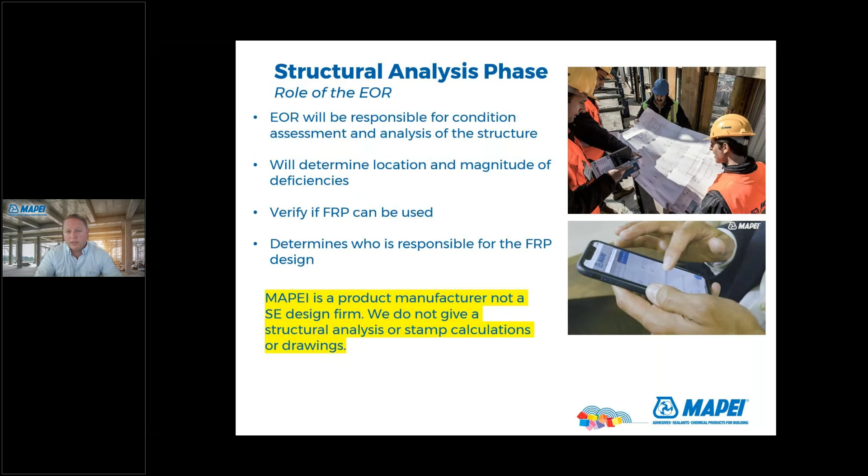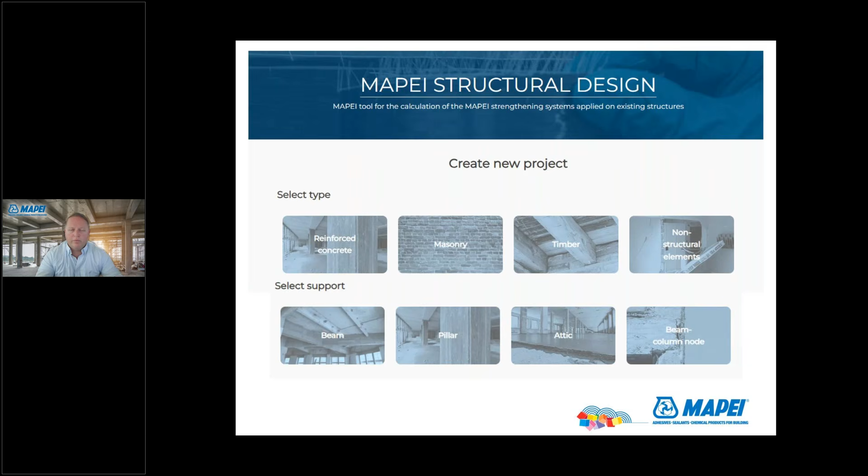One thing we have is this MAPEI structural design, a cloud-based calculation tool. This is used globally in a lot of MAPEI's subsidiaries, and we're going to be bringing this to the U.S. in the near future—we're working out some updates to the code right now. You select the type, whether you're looking at a concrete building, masonry, or a timber member, and then what it is—a beam, a column, or a slab. From there you put in your inputs, and it will give you a report showing what ACI 440 equations it's using as well.

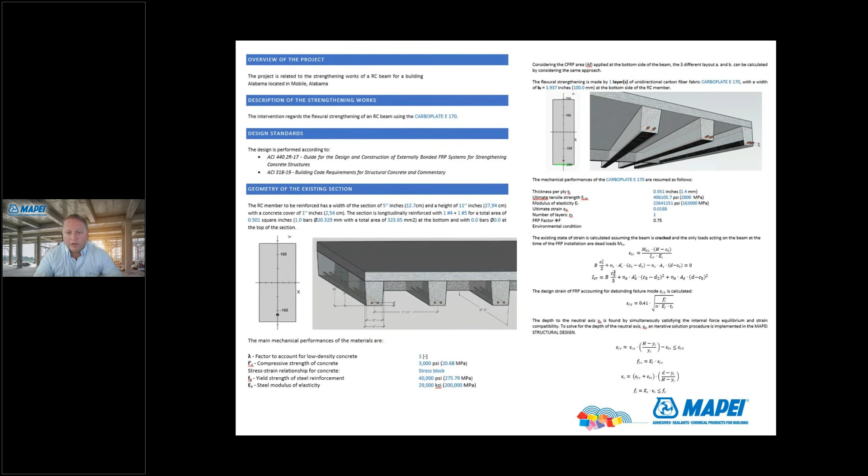And so we work a lot with the design community in this fashion, kind of helping provide them some tools, but ultimately it will be the structural engineer or the engineer of record that will stamp these or do the design himself.

So a few projects to kind of wrap up here. This was a railway pier in Lithuania. They wanted to enhance the bearing capacity and stability, and they couldn't really add a whole lot to the cross section—it's kind of historical in nature. So they used MAPEI's Carboplate going up and down vertically, you can see those black strips there, and then going around the pier they used our fabric, because the fabric molds and goes around corners where the plates don't.

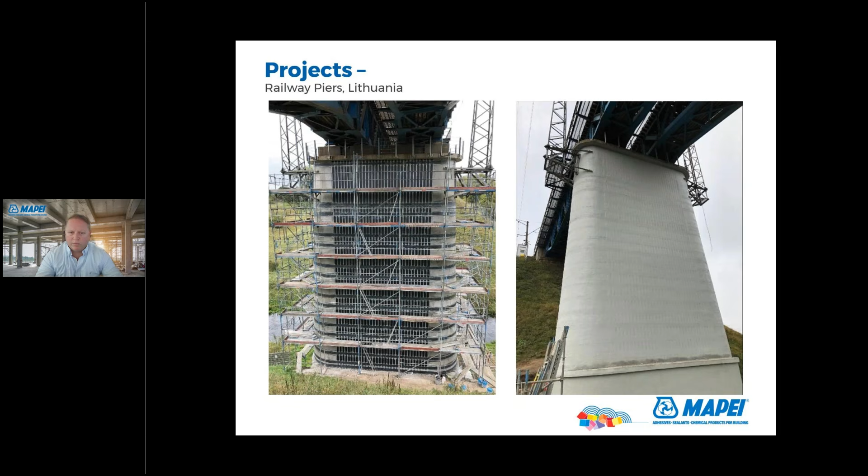It's writing your own meal ticket.

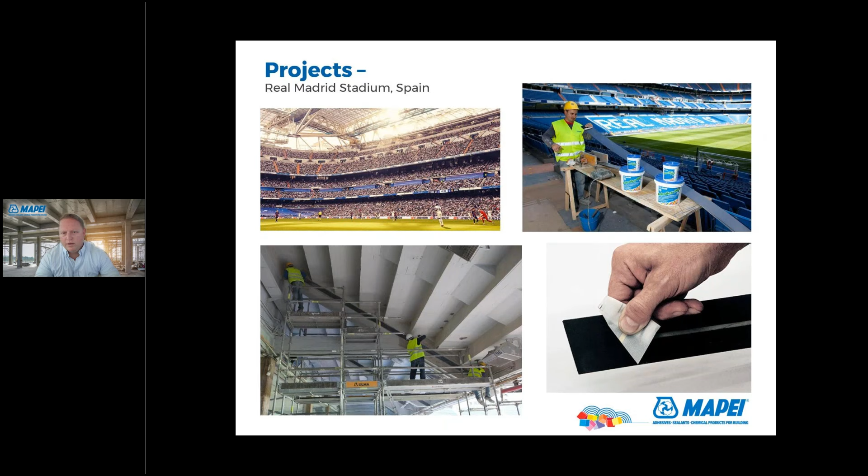Here's a project we did. This is probably the most famous soccer or football team in the world, Real Madrid. This is the stadium where a lot of our Carboplate was used to strengthen.

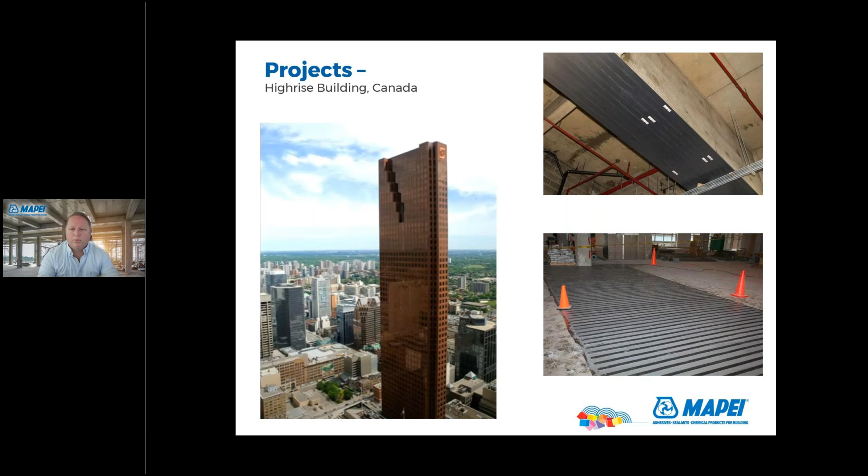Here's a high-rise building in Canada. They were doing a change of use where they wanted the bottom couple levels to be used for a very large conference center, and so they used around 22,000 linear feet of our Carboplate for this increase in anticipated loads.

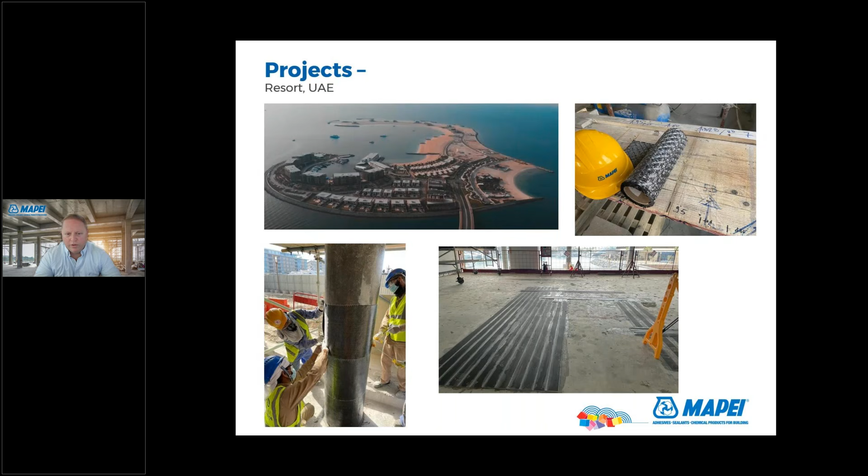Here's a small one, a private seahorse-shaped island in Dubai. You think of the environmental stresses with the high humidity and the salt. FRP is great because it's non-corrosive. We use some of our fabrics to wrap the columns, and some of the plates to strengthen some of the slabs there.